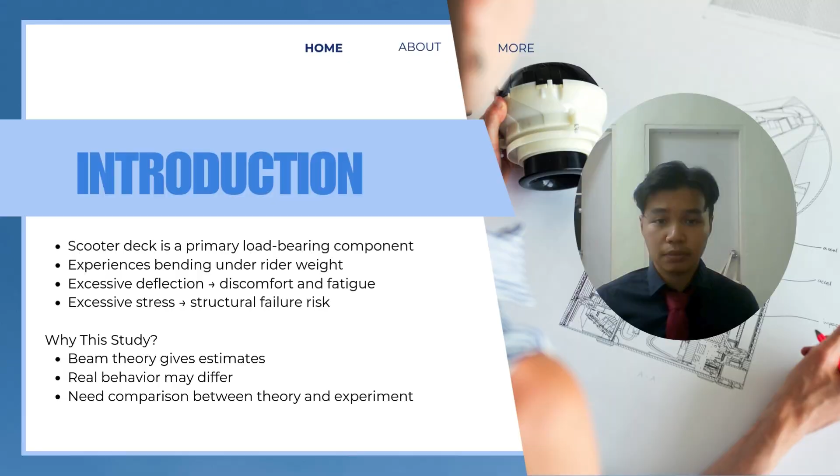The main objectives of this study are to measure the deflection of the scooter deck under different riders' loads, calculate theoretical stress and deflection using beam theory, and compare both results. The scope of this project is limited to static loading on the scooter deck only. Other components such as wheels and handlebars are excluded. Aluminum 6061 T6 is assumed as the deck material.

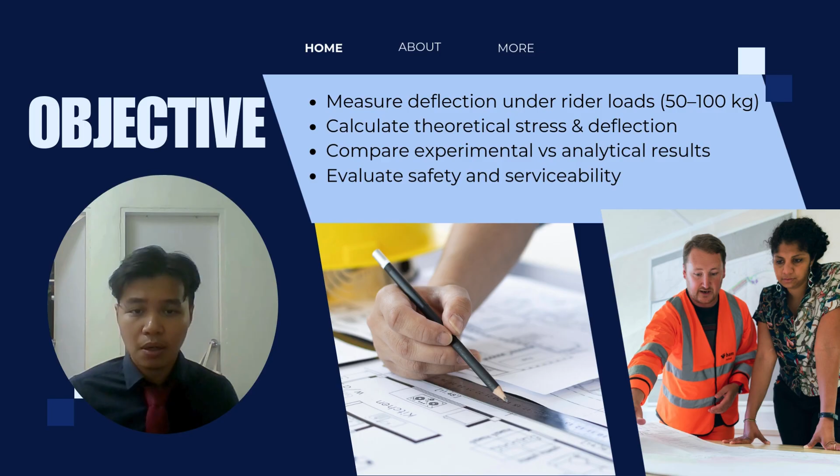For future improvement, the deck geometry can be strengthened by increasing thickness and adding stiffness. Material replacements such as aluminum 7075 T6 or carbon fiber are also recommended. Further studies should include experimental validation, dynamic loading, and fatigue analysis.

First, we go to methodology. First section, methodology and structure modeling. In this project, we analyze the scooter deck using Euler-Bernoulli beam theory. We model the deck as a simply supported beam with the wheels acting as the supports. To represent the rider, we applied a point load directly to the center, testing weights from 50 kg up to 100 kg. We calculate the maximum bending and deflection to ensure the deck is strong enough and stays stiff under pressure.

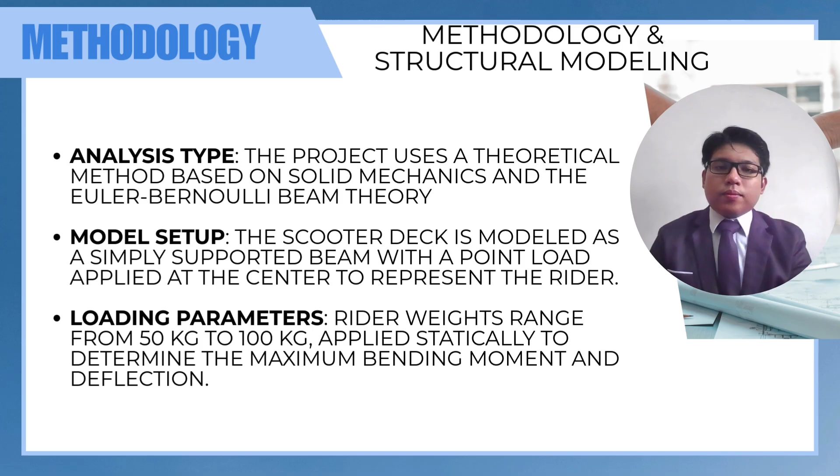Next, we go to geometry and material properties for our team project. First, deck dimension: length 0.8 meters, the span between wheel attachments; second, width 0.08 meters, the standing surface; and third, thickness 0.007 meters for critical bending resistance. And the material of the scooter is aluminum alloy 6061 T6.

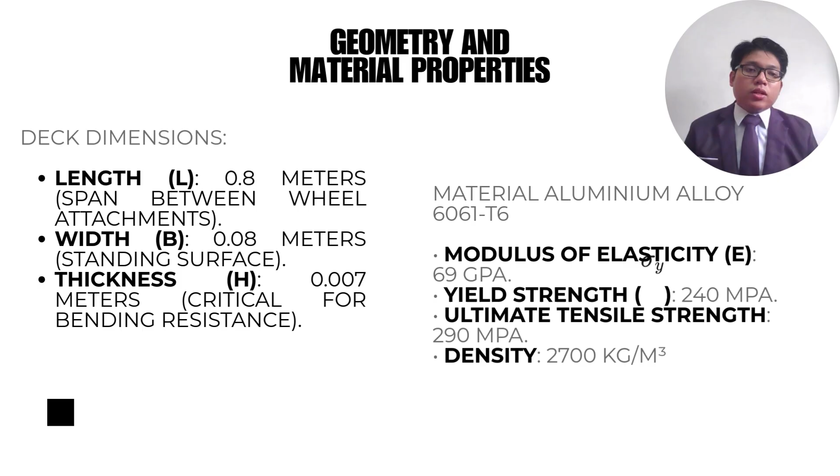First, modulus of elasticity is 69 GPa, yield strength is 240 megapascal, third, ultimate tensile strength is 290 megapascal, and density is 2700 kilograms per meter cube. For this model we use a scooter. We got the scooter at the library PTTA, and we use it for our team project.

Next, the theoretical equations and analysis goal. In this project, we use 4 equations to calculate the deflection of the scooter. First, moment of inertia. Second, bending moment. Third, bending stress. And the last one, mid-span deflection.

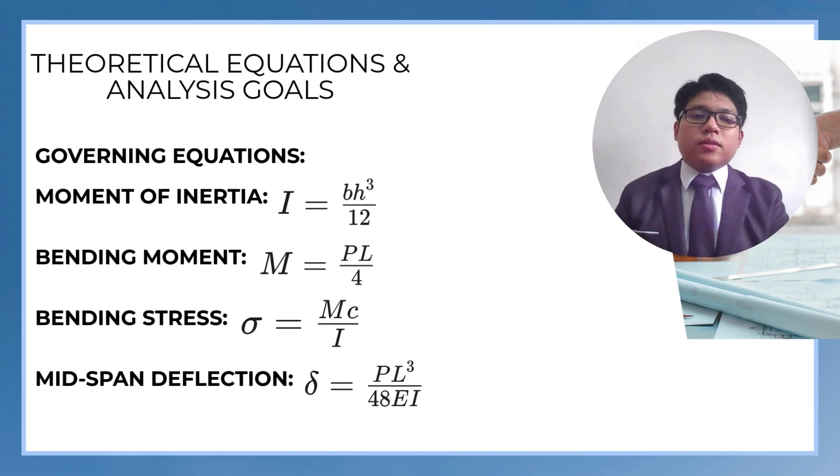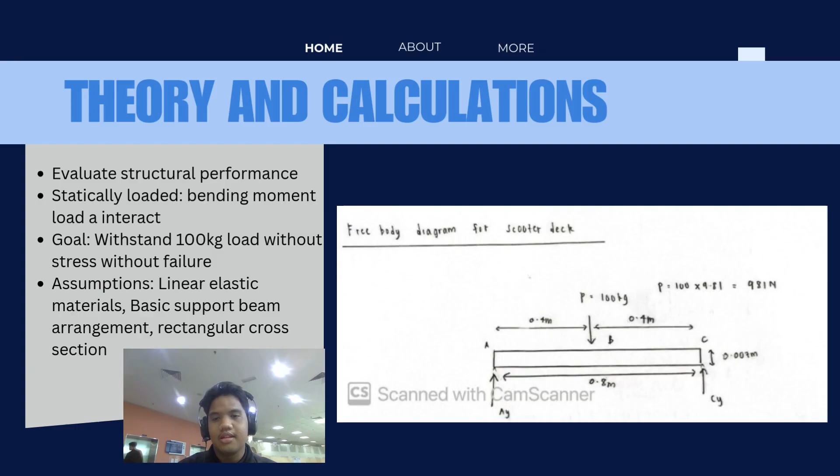So, this is our free body diagram for the scooter deck, and this one is to evaluate structural performance, static loading, bending moment, and load interaction. So, our goal is to withstand a 100 kilogram load without failure. Our assumptions are a linear elastic material, a simply supported beam arrangement, and a rectangular cross section. Okay, so we continue to the next.

The first one is project overview and objective. The primary aim is to perform a comparative structural performance evaluation between two common manufacturing materials. Success is defined by the deck's ability to support a standard 100 kilogram static load without reaching its material yield point or experiencing permanent deformation. Our key analysis focuses on four critical engineering metrics: bending moment, moment of inertia, bending stress, and lastly maximum deflection.

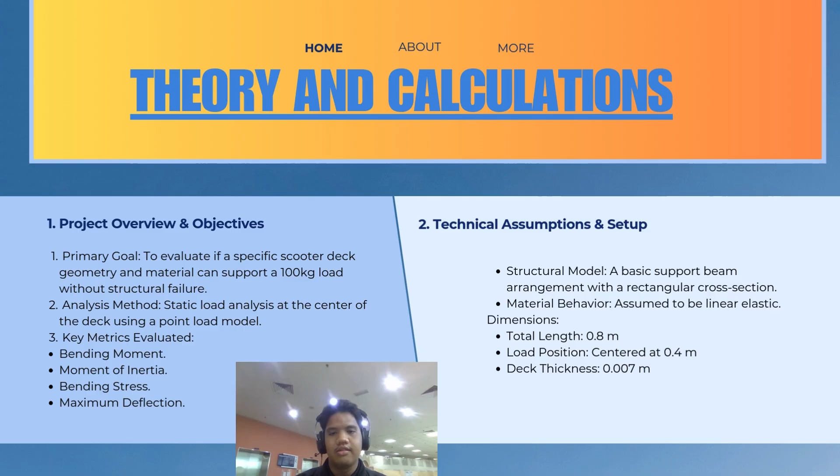The second one is technical assumptions and setup. The structural model is a simply supported beam arrangement with a rectangular cross section, and the deck is defined as 0.8 long with a thickness of 0.007.

So we're going to continue with number 3 and 4. Number 3 is the material comparison between aluminium and carbon fiber. For stress, both materials were subjected to a calculated bending stress of 300.31 megapascal based on the 100 kilogram load. And for weight advantage, carbon fiber is roughly 40% lighter than aluminium, with a density of 1.6 gram versus 2.7 gram. And then we continue with number 4, key findings and recommendations.

Aluminium failure: aluminium 6061 T6 is deemed not suitable because the bending stress exceeds its yield strength and its deflection far exceeds the 32mm allowable limit. So for design iteration, the final recommendation suggests that while carbon fiber is the better material, the deck geometry may need to be adjusted to further reduce bending or deflection.

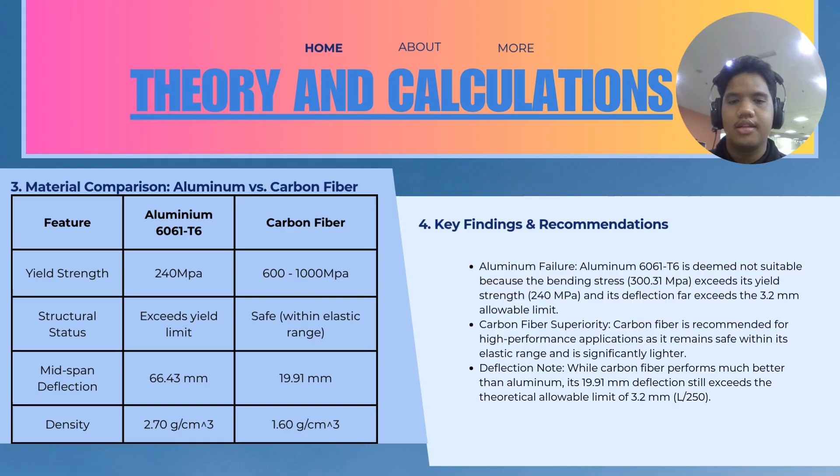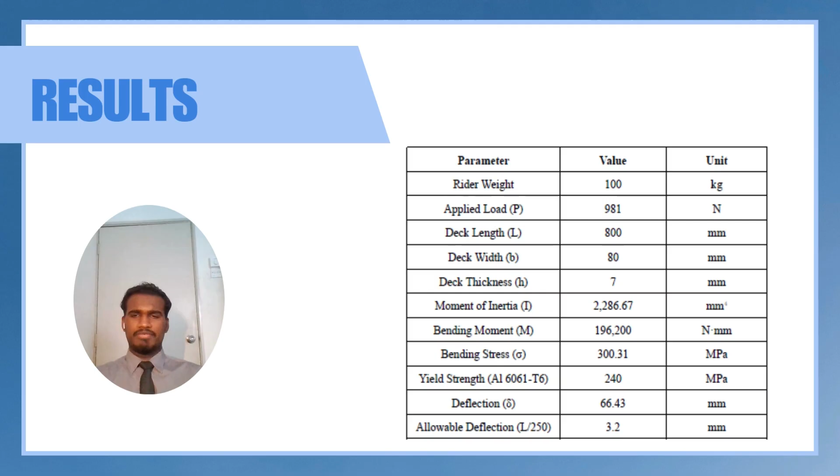Today I will be explaining about the results. The following table summarizes all the important values obtained from the theoretical analysis of the deck of the scooter under static loading. The parameters include geometric sizes, calculated bending moment, stress, deflection, and metal strength. The data evidently illustrate the structural response of the deck when subjected to a 100 kg point load at the center.

Safety is our top priority, and our analysis proves that the current 7mm aluminum design is structurally unsafe for a 100 kg rider because the stress exceeds yield limits and deflection is 20 times the allowable standard. This deck will likely suffer a catastrophic snap failure during real-world use. To fix this, we propose a two-part remedial strategy.

First, we must optimize the geometry by thickening the deck to at least 10 mm and adding internal ribs to limit bending. Second, we recommend upgrading the material. For high-end decks, titanium or carbon fiber offer the best safety margins. For mid-range models, switching to aluminium 7075 T6 provides a cost-effective way to double the yield strength. Ultimately, only a complete redesign can guarantee the structural integrity and durability required for the rider's safety.

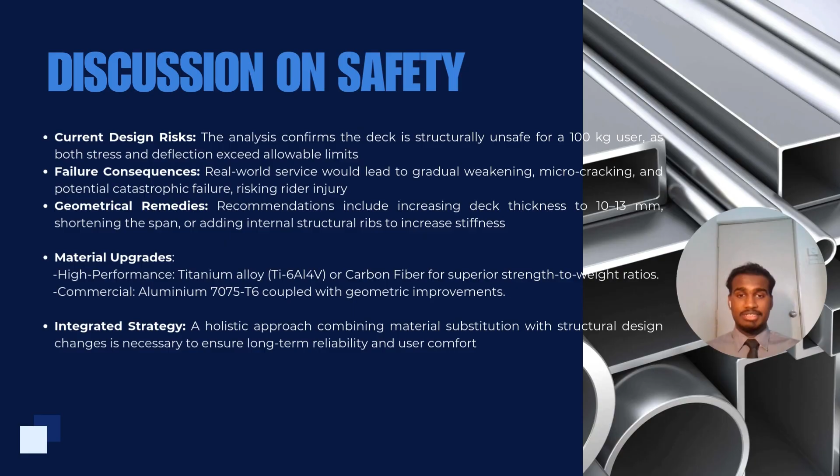Looking at our comparison, the current design faces a critical failure. The calculated bending stress of 300.31 megapascal exceeds the yield strength of our aluminium, which is aluminium 6061 T6, by 25%. This means that under a standard 100 kg load, the deck will suffer permanent, non-reversible deformation.

To solve this, we recommend moving to a superior material, which is aluminium 7075 T6. It's a great economical choice that nearly doubles our yield strength to 503 megapascal. For premium performance, titanium or carbon fiber offers a yield strength up to 1000 megapascal. Our final verdict is clear. The current metal is inappropriate for this design and must be upgraded to ensure safety.

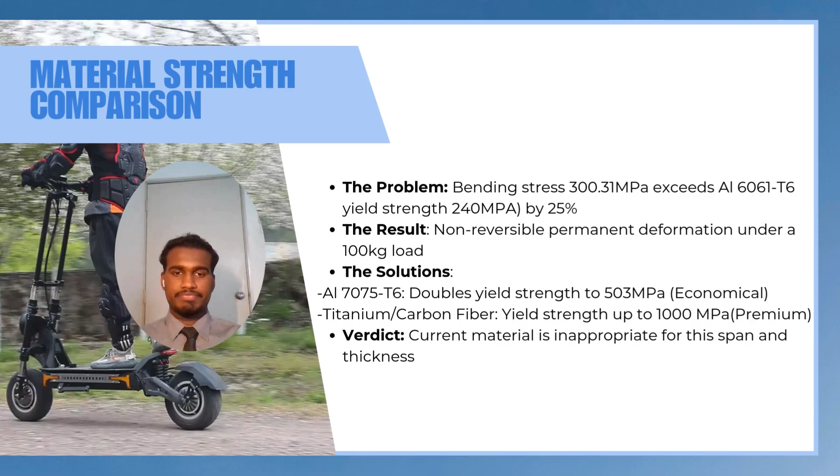In conclusion, the analysis shows that the current scooter deck design using aluminium 6061 T6 is not suitable for a rider of 100 kilogram weight. Both bending stress and deflection exceed acceptable limits, indicating failure in terms of strength and serviceability.

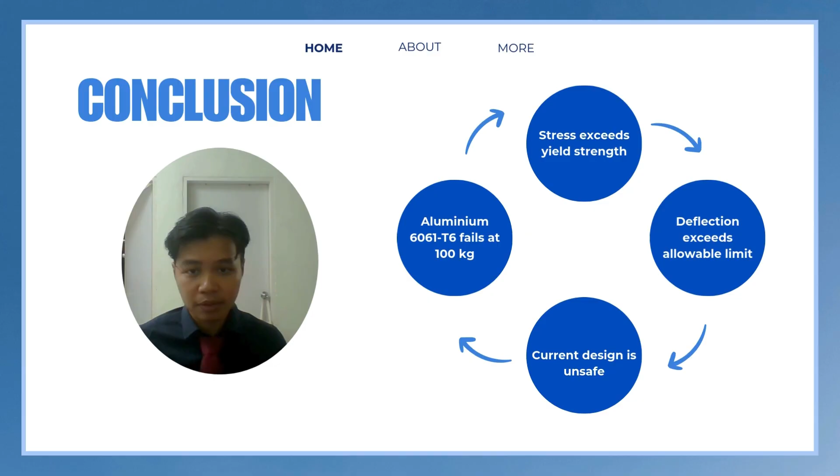In this demonstration, we are applying three loads, 50 kg, 75 kg and 100 kg, representing lightweight, average and heavyweight riders, as shown in our report. Now we will demonstrate the effects of different riders' weights on this scooter deck.

I myself weigh 50 kilograms, so I will be standing at the center of the scooter deck and remain stationary. At this load level, the deck shows a small amount of deflection, which is expected for a lower applied load.

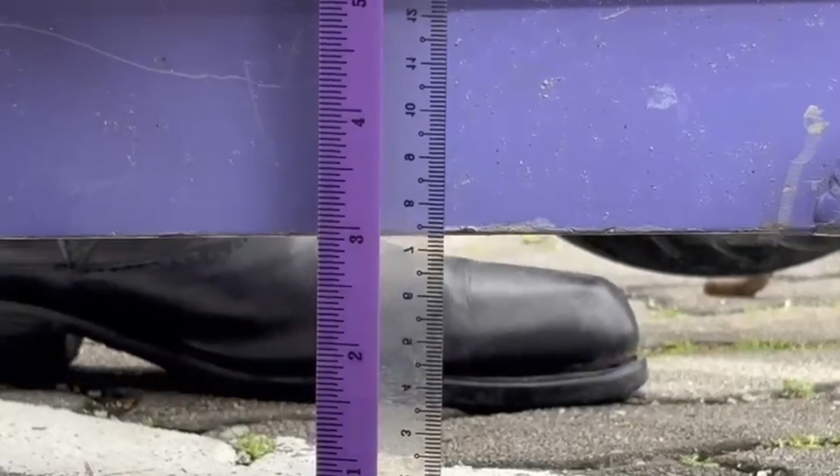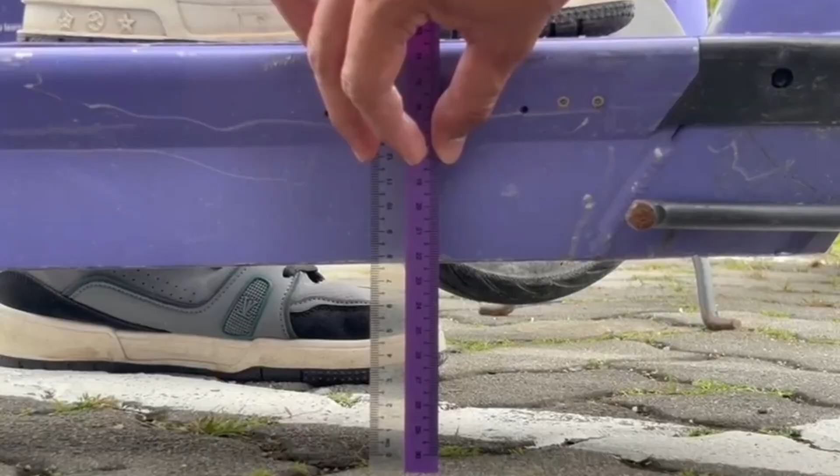Next we go to the 75 kilogram rider. The 75 kilo rider is at the same position as before, and we can observe deflection. We can notice with 75 kilograms the higher deflection: the higher the load, the higher the deflection.

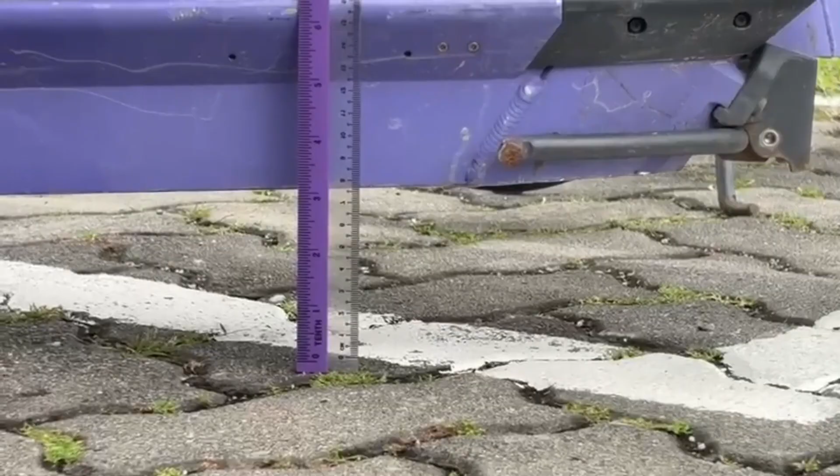At this highest load, the rider is standing under the same static condition. At this highest load, the deck is experiencing the largest visible deflection, which represents the most critical case in our study.

As a conclusion, this scooter behaves like a simply supported beam. The deflection increases according to the increase of the rider's weight. And these observations we have concluded in our analytic results in our report.